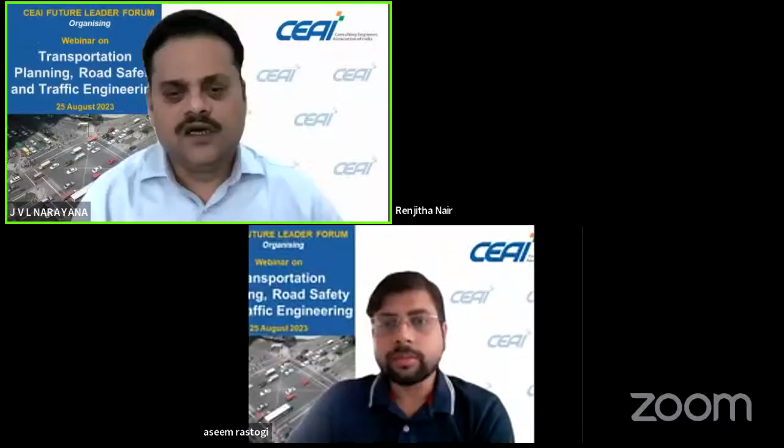I'm extremely happy to be part of this webinar organized by CEAI Future Leader Forum. You may all be aware that CEAI is an apex body of consulting engineers in India, having membership of organizations as well as individuals. It was incorporated in 1996 with the merger of two leading national associations: Association of Consulting Engineers India, established in 1960, and National Association of Consulting Engineers, NACE, incorporated in 1976.

Thus, you could see that we bring about 6 decades of accumulated experience as CEAI, and we have about 500 plus members today, representing large, medium, small consultancy companies and organizations, both from public and private sector, and eminent individual consultants. CEAI is also a member association of the International Federation of Consulting Engineers, commonly known as FIDIC, representing the consulting engineering fraternity in India.

Now, the objectives are quite clear: advocating global networking and cooperation amongst consulting engineers. Quality development is a key thrust, along with production and enhancement of consultants' expertise. Promotion of ethical practices of consultants is very key and pivotal for us. And then facilitation and interaction with government and other authorities to streamline and improve the system of working and the constraints that consultants face from time to time are some of the key objectives of CEAI.

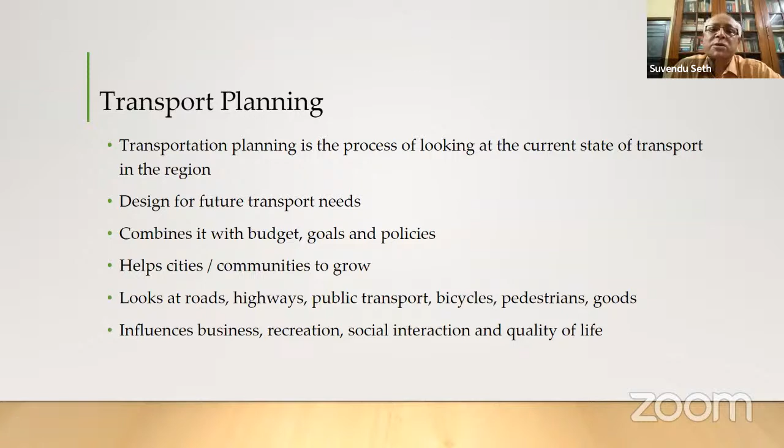We all have a basic idea of what transport planning is. It's a process of looking at the current state of transport in a region, then developing and designing for future transport needs, combining it with budgets, goals, and policies. It helps cities and communities to grow. It doesn't only look at one particular mode of transport, but various modes like highways, roads, public transport, and also non-motorized transport like bicycles and pedestrians, and not only passengers but goods vehicles too. It influences business, recreation, social interaction, and quality of life.

The purpose of transportation planning is to provide safer, smarter, faster, and more convenient modes of transport. We can look at two aspects: planning and programming. Planning is more of a long-term view of transportation strategies — it develops visions, goals, objectives, and then strategies to support that vision, establishing a long-term approach to implement those plans. Programming has more to do with prioritizing projects, matching projects with available funds, and establishing a tangible expenditure so as to implement the project and achieve success in it.

The process of transportation planning is normally referred to as a 3C process: comprehensive, cooperative, and continuous. Comprehensive because it covers the entire planning area, as well as various jurisdictions and various modes of transport.

Transport planning is cooperative because each jurisdiction needs to interact with each other so that transport planning for the entire area can be possible. It is continuous because we cannot just make a plan and keep it; it changes over time. It involves land use, air quality, water quality, environmental policies, and social equity, and there are a lot of stakeholders.

First and foremost are the citizens; the plans are made for them. Then there are businesses, and governments at three levels: local, state, and national. There are various specific interest groups involved, starting with public transport, pedestrians, and various other groups, and it all works within a legal system.

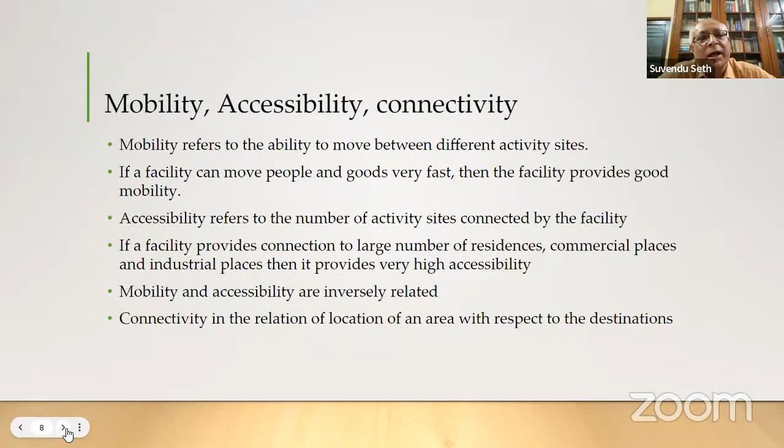Accessibility refers to the number of activity sites that can be connected, so accessibility and mobility are inversely related—if a system has very high accessibility, it will have less mobility. Connectivity is the relationship of a location with respect to its destinations, so we can say a particular area is well connected to A, B, and C. These are the overall ideas of mobility, accessibility, and connectivity.

First, let's talk about the present scenario of transportation, which we are all aware of. All categories of road users face problems in everyday commuting. Pedestrians do not get a safe place to walk and often face obstructions in the pathways. Cyclists find it very difficult jostling between fast-moving vehicles and do not have dedicated ways in most cities.

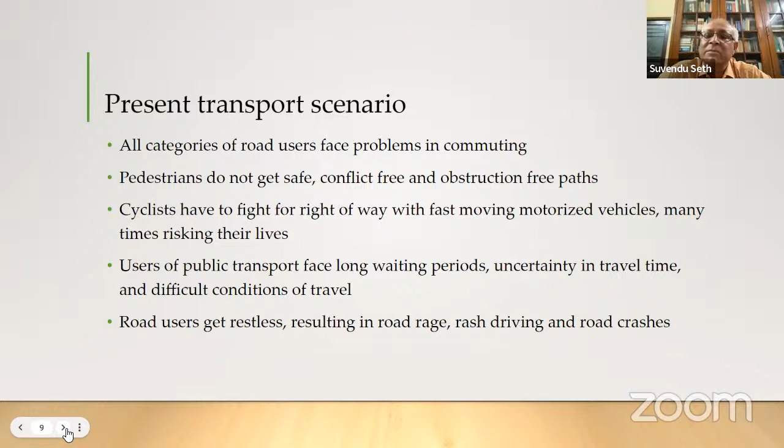Users of public transport face long waiting periods, service is often not good, and travel takes a long time. Road users get restless, resulting in road rage, rash driving, and road crashes, which is not at all good.

There is deficiency in transport infrastructure in terms of both quality and quantity. More sustainable modes like walking, cycling, and public transport are often neglected, and their use is decreasing. There's a preference for people to first get two-wheelers, and then, when they can afford it, cars. This in turn gives rise to more congestion, reduced road safety and mobility, and increased use of fossil fuels and road crashes.

To address these issues, our National Urban Transport Policy was developed in 2006 and revised again in 2014. Its first vision was to recognize that people are at the center stage of all plans, and that plans should be for them and for their benefit, to make cities livable—and if cities are livable and people can do their work properly, they can turn into engines of growth.

The policy aims to allow cities to evolve into an urban form that best suits their geography and supports their socioeconomic activities, because one model may not fit another city since geographies and socioeconomic characteristics differ. It also aims to encourage growth along a low carbon path.

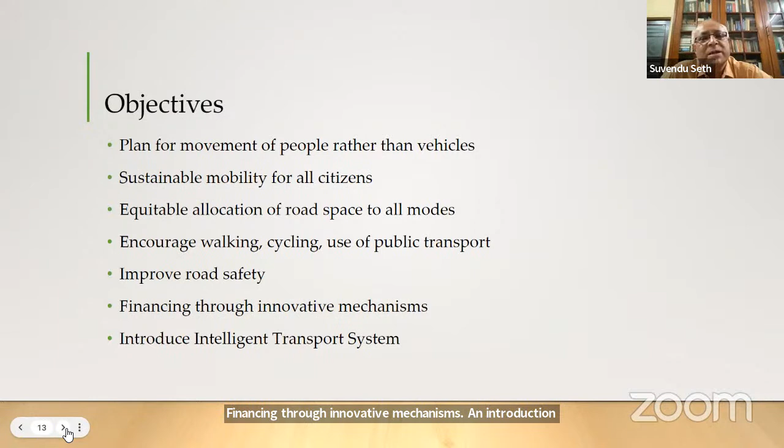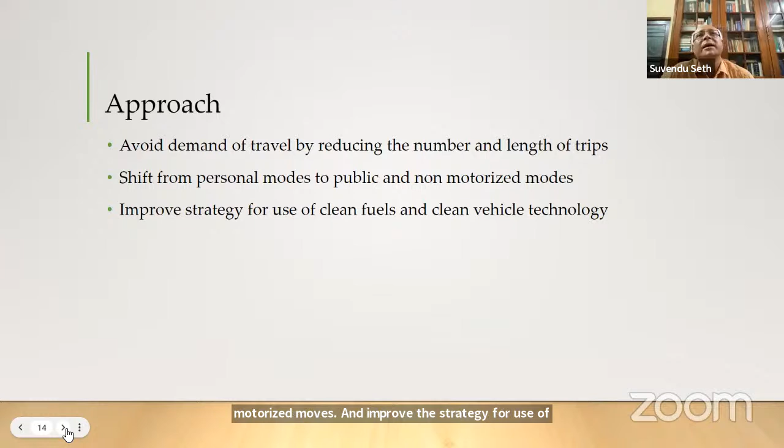The approach is avoid, shift, and improve. Avoid the demand of travel so that fewer trips are made and trips are less lengthy. Shift from personal modes to more public modes and non-motorized modes. And improve strategies for use of cleaner fuels and cleaner vehicle technology for sustainable transport.

One important thing in transport planning is multimodal integration - the integration of various modes of transport, such as metros, BRTs, LRTs, local trains, buses, trams, and water transport. Integration is very important, and it improves access and coverage, and avoids duplication of services in the same areas.

The idea is to make trips short in time and distance, minimizing the number of transfer points to make it easy for people to transfer from one mode to another. The various aspects of multimodal integration are physical integration, information integration, and fare integration. I'll go over these in short.

The first one is physical integration. This means co-locating various modes of transport - for example, a taxi stand or bus terminal right outside a railway station, or walkways to connect buildings. These help people move from one mode to another.

Connecting networks at the airport - connections with LRTs, trams, metros, or ferries, and walkways - make it easy for people to use one mode and go into another. Terminals and station facilities are very important for transfer, and facilities like cycle storage or walkways help people access terminals better.

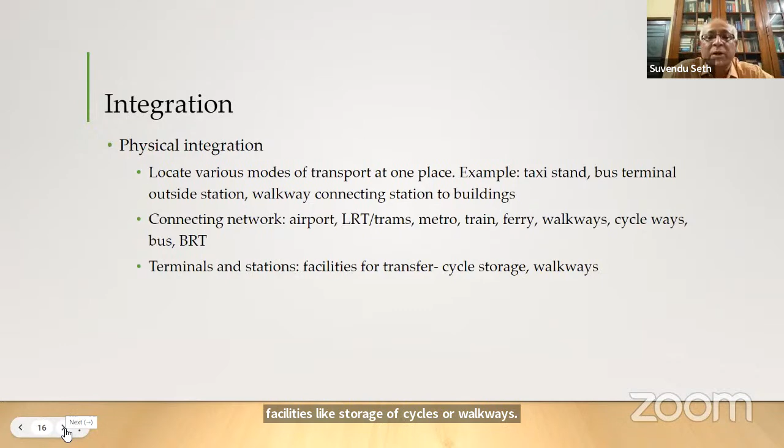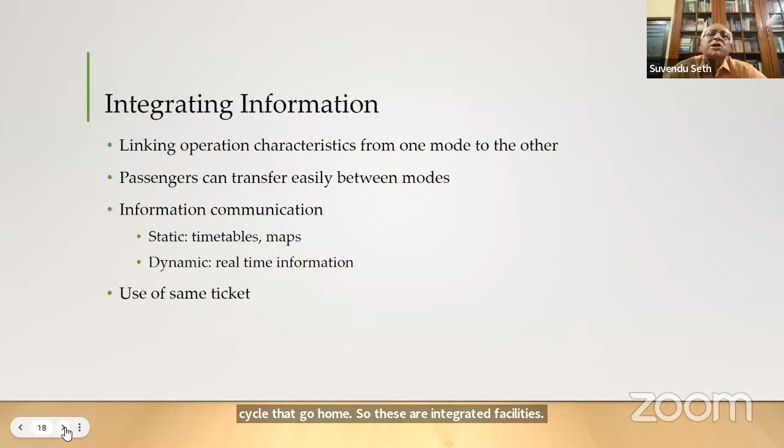Next, coming to integration of information - this is linking operational characteristics from one mode to another so passengers can transfer easily. They have information to see where the next stop is, what facilities are available, and so on.

This information communication can be either static or dynamic. The old way was static mode - timetables and maps. Nowadays we can have dynamic real-time information on web applications, where you can see where the next station is, when the next train or bus is coming, and so on.

Use of a single ticket is also very useful, so one does not have to buy tickets for every system - one ticket covers all.

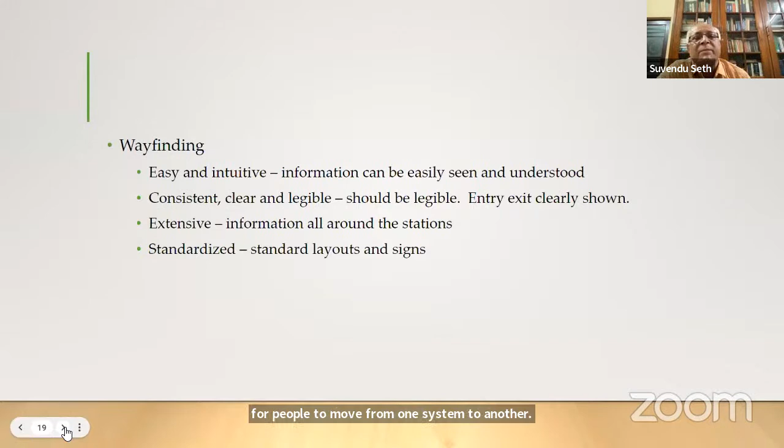The next is wayfinding - by means of signage and markings, making it easy for people to move from one system to another. This should be easy and intuitive, with information that can be easily seen and understood. It requires clear and legible signs and markings, with entry and exit clearly shown.

Information should be all around the station so that even if one misses one sign, they can see the next one. It should be in standardized forms, layouts and signs so that one can recognize the signs and look for it in the next place.

Next comes the integration of fares. If the fares are integrated, it will be easy for passengers to transfer between modes. They do not have to pay every time.

A common card is one example, the Oyster card in London, which can be used for buses and the underground. Then there's common transfer, free transfers between train and bus - if you have a train ticket, you can get a ride on the bus or the other way around. And integrated ticketing, like if you go into the airport, you can get a free shuttle or use of a shuttle with paid parking. These facilities can encourage people to use multimodal transport.

I'll come to another topic, which is transit-oriented development. This has become quite common now in several parts of the world. It is a development around a major transit station, which could be a railway station or a BRT station where mass transit can occur.

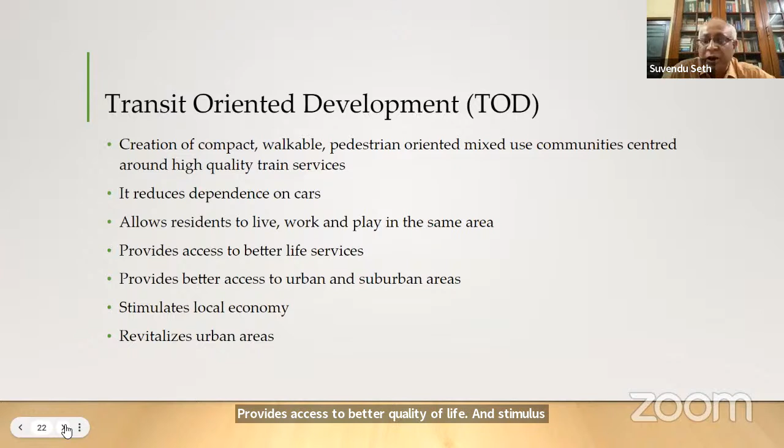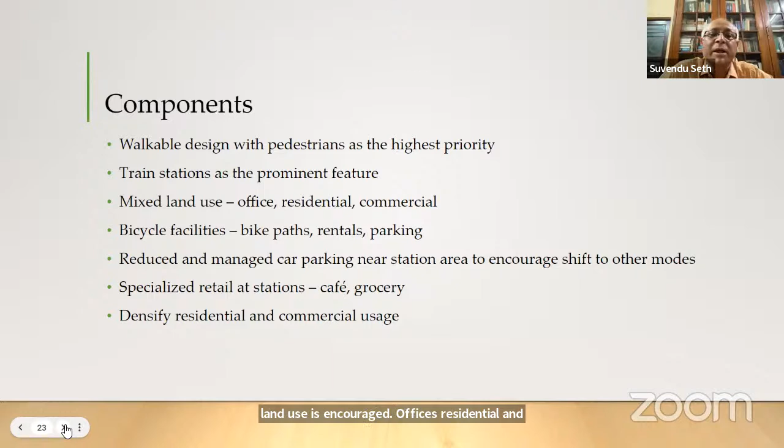The components of a TOD are walkable design with pedestrians at the highest priority - it's designed around pedestrians first. Train stations are the prominent features. Mixed land use is encouraged - offices, residential and commercial buildings so that people can do their work easily. After walking, it's bicycle facilities, rental and parking facilities.

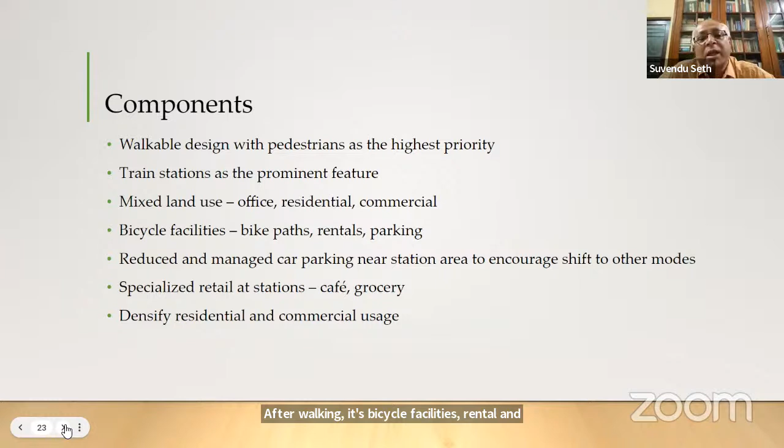Car parking is reduced and managed, and can be put in the peripheries because emphasis on car usage is less. Specialized retail can be put up in the station areas so that people can do their groceries, go to the cafe or restaurants. Density and high density residential commercial buildings are encouraged.

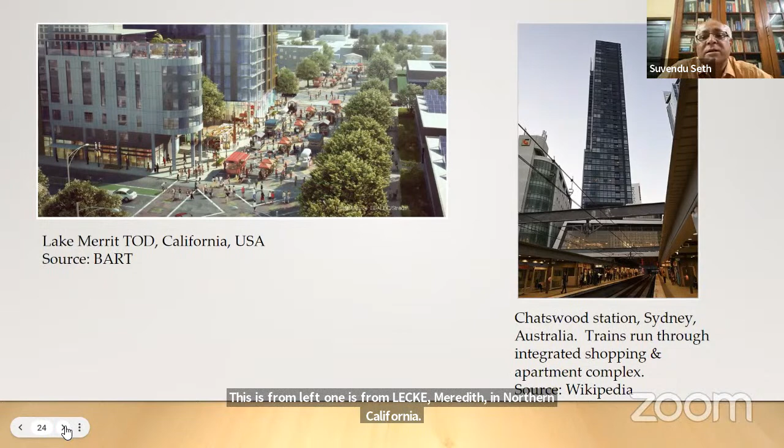Here are a couple of examples of TOD. The left one is from Lake Merritt TOD in Northern California, and the right one is from Sydney. It shows the train station integrated with the buildings so that people can get down from the building and take the trains directly, making it very easy for them to use.

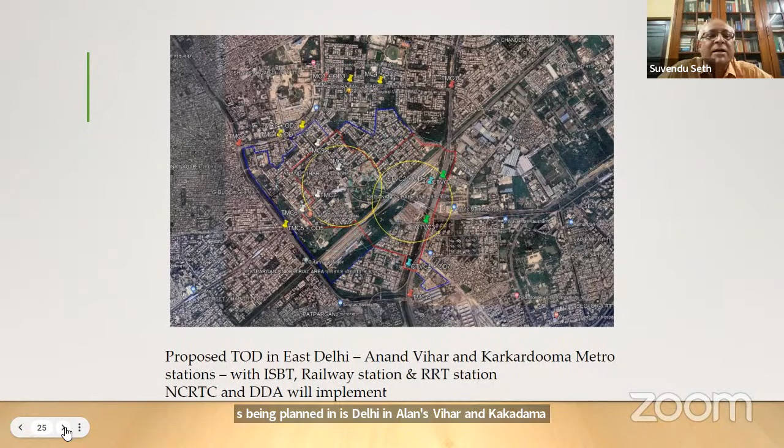The next topic is inland waterways. In India, we have always had waterways, but somehow it wasn't very encouraged for quite some time. In the last 10 to 15 years, it has picked up again. The major waterways are NW 1, 2, 3, 4 on River Ganga, Brahmaputra, in Kerala on the west coast, and on the Krishna rivers. The Jal Marg Vikas project was taken up to connect Varanasi and Haldia, to have a fairway, and this project is still underway.

Apart from these overall country-level projects, in the urban areas water ferries are also getting improved. We already have water ferries in Kolkata, Guwahati, Kochi, and Mumbai.

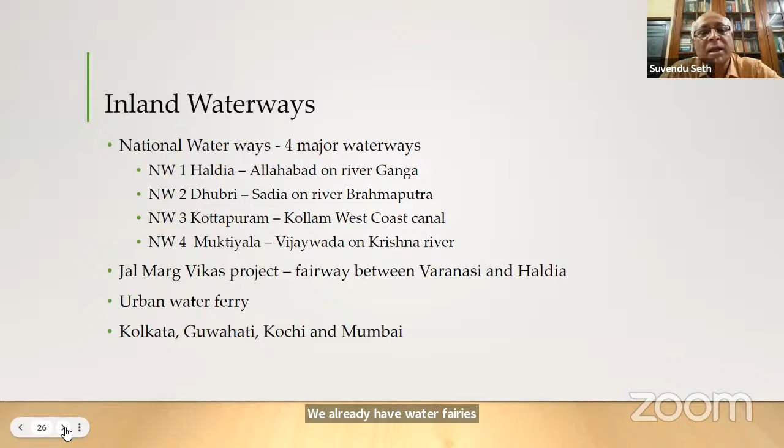This is a figure showing the waterways in eastern India - Ganga, Brahmaputra in Assam and in the states of West Bengal, Bihar, Jharkhand, Uttar Pradesh. We also have a protocol route, India going through Bangladesh, used for sending goods and ships through Bangladesh to Assam from Haldia. This has been going on for some time and has encouraged water transport.

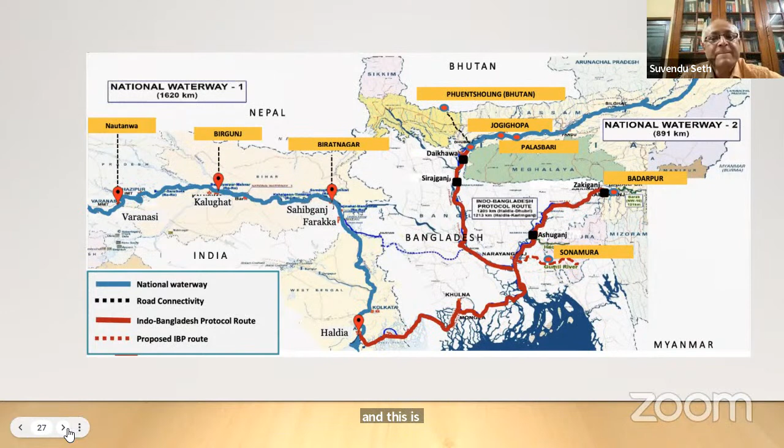For urban ferry services, the important thing is to look at routes and service types. Traditionally, the service type has been cross-river, from one bank to the other. Generally, there are three types of services: a linear system where various points along the river are connected, a simple river crossing with 2 points on one side and 1 point on the other, or linking suburbs with the inner city.

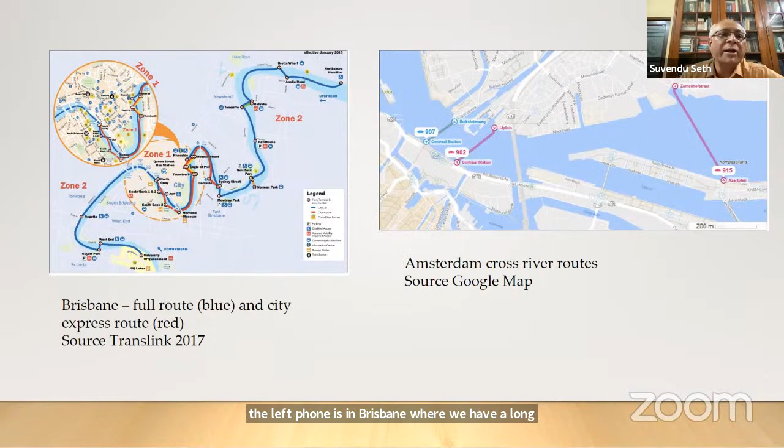I'll give some examples. On the left is Brisbane, where we have a long distance service from inner areas to the main city, and again an express service inside Brisbane to connect various points along the river. Amsterdam is the example here connecting point to point across the river, with many ferry services across the river for people to use.

This is from Stockholm, where all 3 types are present. We have the A type, in blue, connecting various points. B type, in red, which is a 3-point connection in the city. And the yellow one, connecting the inner areas to the city. All 3 types are present there.

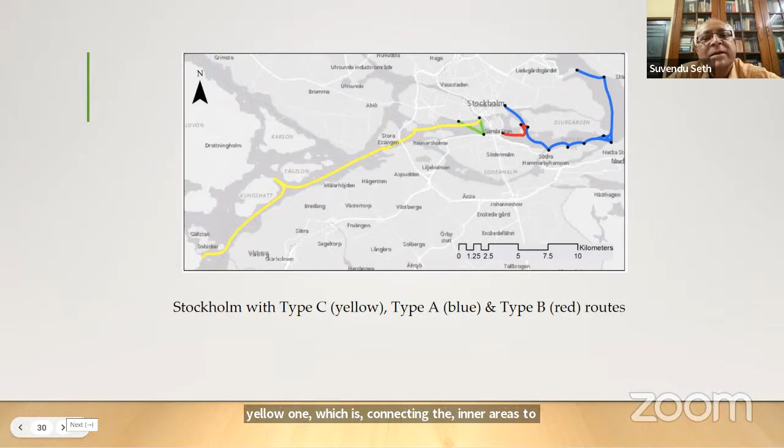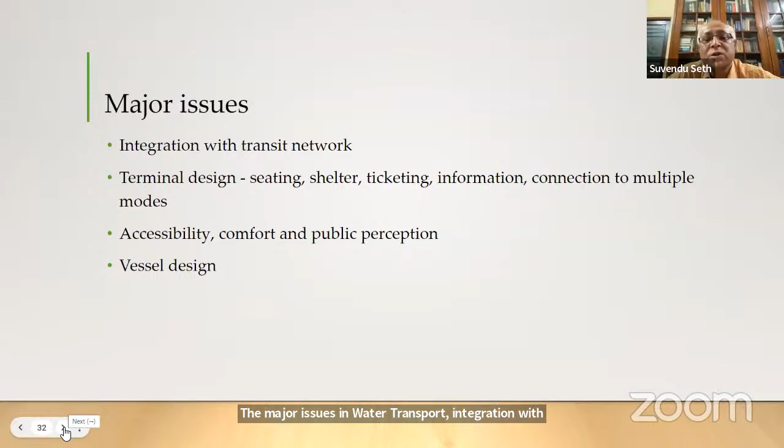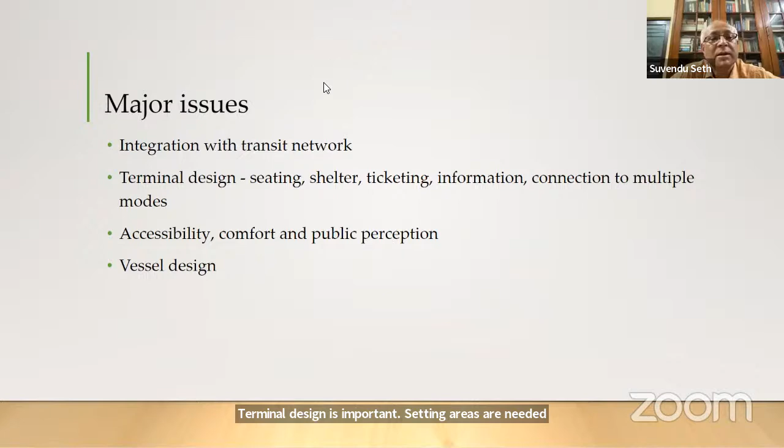The major issues in urban water transport are integration with the transit network. It has to be well integrated with other networks so that people can use it easily. Terminal design is important - seating areas, shelter, ticketing, information, and connection to other modes are needed. Accessibility, comfort, and public perception also matter. Public perception is important because if the public perceives that ferries don't run on time or aren't reliable, people will not use them.

Another important point is vessel design - not all kinds of vessels can be used for ferries. There are specific types of vessels to be used. This is a major aspect of water transport.

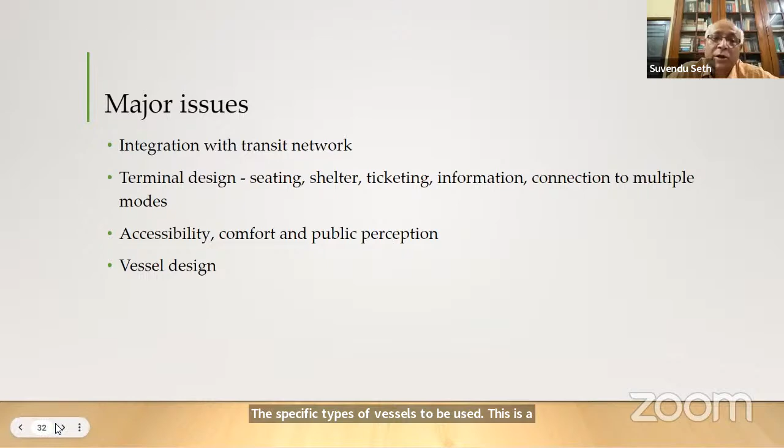Some pictures from India. Kolkata Ferry Service, which has been there for a long time. Guwahati Ferry Service, which has also been there for quite some time and is now being modernized. Kochi has a new water metro system, connecting the various inner areas to the newly created metro through this water metro.

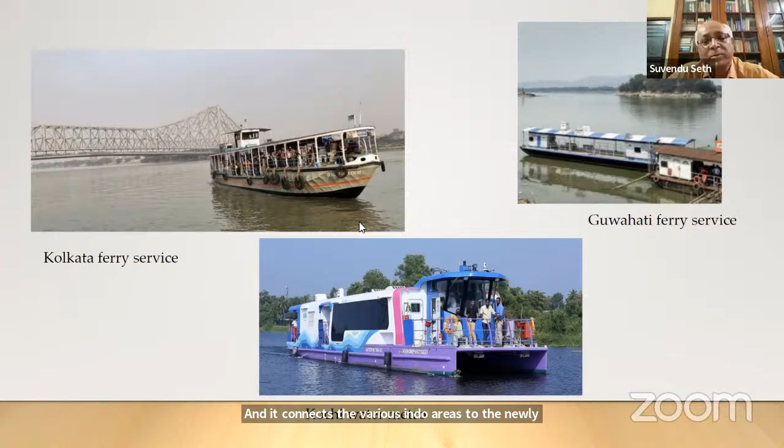Now I'll go to the next topic, which is road safety. This is a very important topic. I'll just touch on a few points in road safety.

First, I'll give a few statistics, which are not very nice. Nearly 1.25 million people die on the roads from road crashes, and 3,287 people die every day - this is just the number of fatalities. On top of that, there are people who get injured or disabled, a huge number, 20 to 50 million people. I won't go over all the statistics, but most people affected are young people between the ages of 15 and 44. One sad fact is that over 90% of all road fatalities occur in low and middle income countries, where these countries have less than half of the world's vehicles but contribute to more than 90% of the fatalities.

The situation in India is also not very nice. We have more than 4.5 lakh crashes occurring every year - this data is a few years old, so it may be even more now. The fatalities are more than 1.5 lakhs, and again here in India, it is young people who get hit, injured, and killed. The national highways comprise around 2% of the road network but contribute to 30% of crashes and 35% of fatalities. State highways comprise 3% of the road network but contribute to 25% of crashes and 27% of fatalities. Pedestrians, cyclists, and two-wheelers together contribute to more than 54% of the fatalities - these are the vulnerable road users.

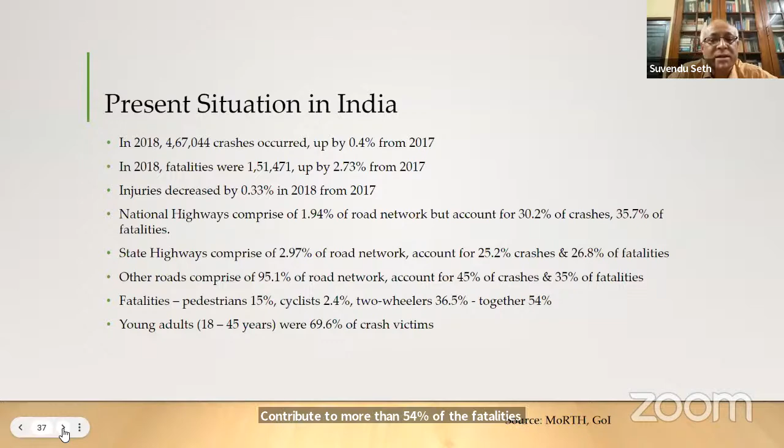A global plan for road safety action was developed, from 2011 to 2020, but it has now been extended to 2030 to address this issue of road safety globally. 5 road safety pillars were made to address road safety issues: road safety management, safer roads and mobility, safer vehicles, safer road users, and post-crash response.

There are various approaches to address road safety. I'm talking only of the engineering parts - there are various other non-engineering aspects also, which I'm not touching today. The 3 main approaches here are crash analysis, mitigation measures, road safety audit, and the international road assessment program. I'll briefly go over these topics, starting with crash analysis.

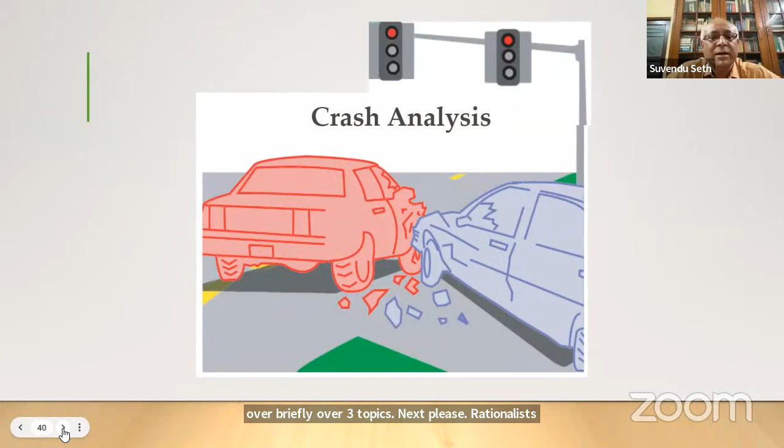Crash analysis identifies the location where most crashes occur, then quantifies what kind of crashes occur, what are the problems, why it occurred, and then tries to find out improvements - what can be done to improve the situation so that these crashes can be avoided - and then implement those actions so that the situation can be improved. In short, that is what is done in crash analysis.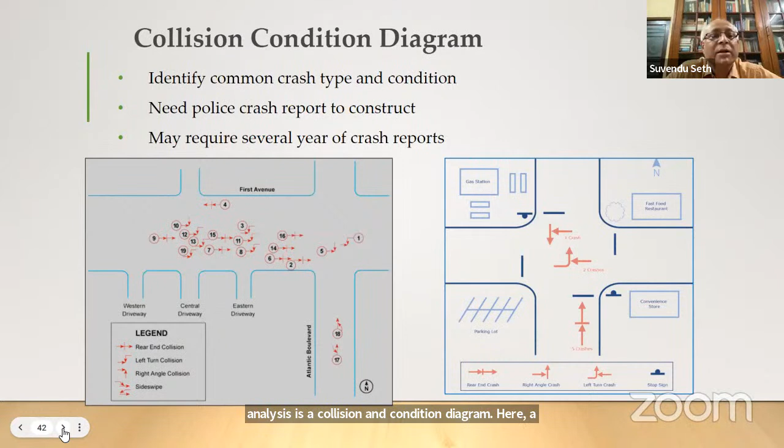One important analysis tool in crash analysis is a collision and condition diagram. Here, a graphical representation shows what exactly happens and why the crash happened. Various legends like rear end crash or left turn crash use various symbols, put into the figures so that one can understand just by taking a look at it what kind of crashes happened, how many crashes happened, and whether it was injury only, severe injuries, or fatalities. Also, the day, time, and weather conditions are put into this map.

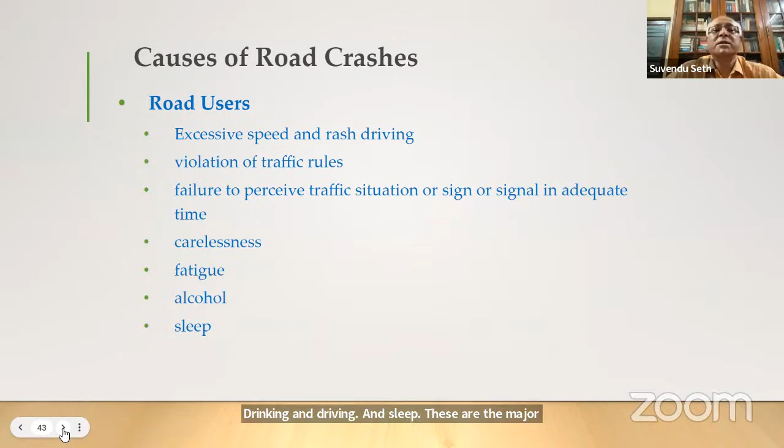The various causes of road crashes include the road users and other causes. The typical road user causes are excessive speeding, not obeying traffic rules, or failure to perceive the traffic situation ahead - probably the signs or signals could not be read. Carelessness, fatigue, drinking and driving, and sleep are the major causes of road crashes by road users.

Then there are reasons related to vehicles, which probably were not functioning properly. Road conditions - it was either foggy, or skidding, or the road surface was not good. There were potholes and ruts. Road design could have flaws in the geometric design. Sight distance available was probably not proper. Shoulder widths were not present. The curves were too sharp. Traffic control devices were probably not right.

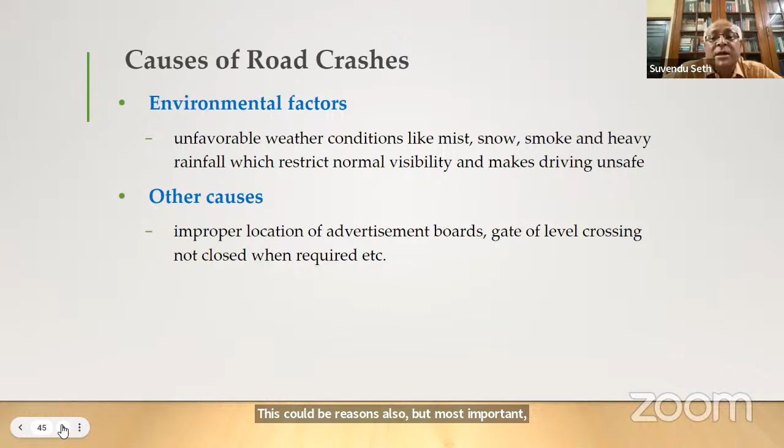There are environmental factors like snow, mist, and fog, where one could not see the road properly. Apart from that, there could be other causes also - for example, a big advertisement board which blocked the vision, or a level crossing gate that did not close properly. These could be reasons also, but the most important are the users' causes.

If you look at the crash factors, human factors contribute the maximum to the crashes, followed by environmental and vehicle factors. And when they overlap, it becomes even more risky.

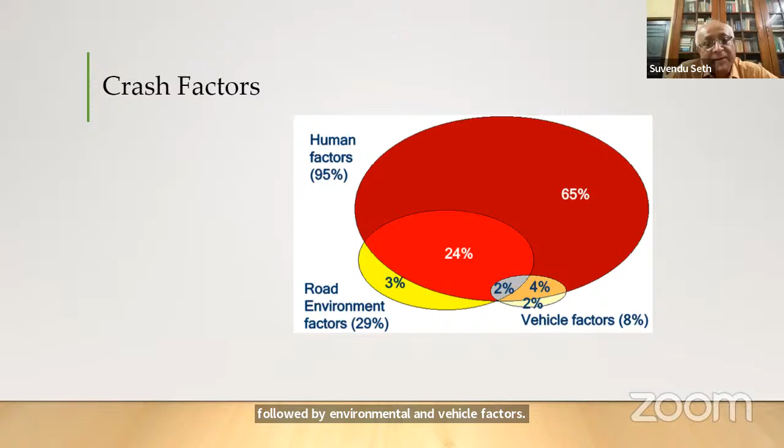Crash data collection is the first step to crash analysis. Police has the responsibility of keeping the records for crashes. The engineer has to gather the record, analyze at what spots those crashes occurred, and then analyze why it happened and what actions are to be taken.

The crash data that is collected normally includes the date, time, and where it occurred - the location, the type of vehicles involved in the crash, and the nature of the crash. Collision diagrams are drawn from it, and the numbers are found for injury only, property damage only, or fatalities. These things are all analyzed.

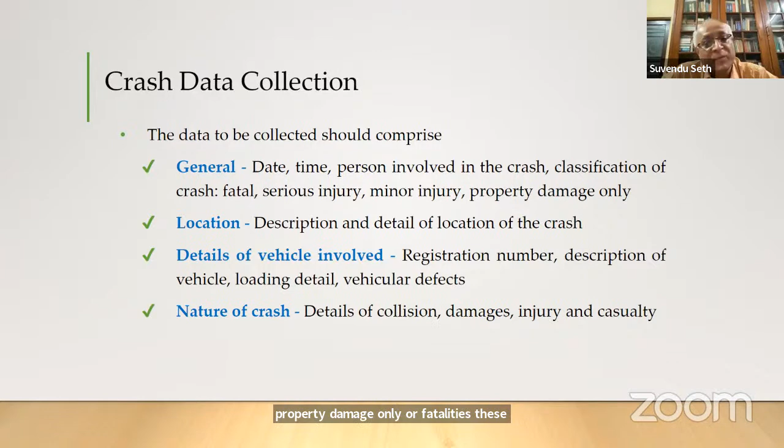Now, the next question is about the black spot. We hear a lot about black spots these days. A black spot is basically where a number of crashes occur - so it's called a black spot. According to the MORTH protocol, any location where more than 5 accidents have occurred in the last 3 years, or any location where more than 10 fatalities have taken place in the last 3 years, is called a black spot. By spot, we don't mean just one location - it's about 500 meters in length. If these things have happened within that length, then it's defined as a black spot, and action needs to be taken.

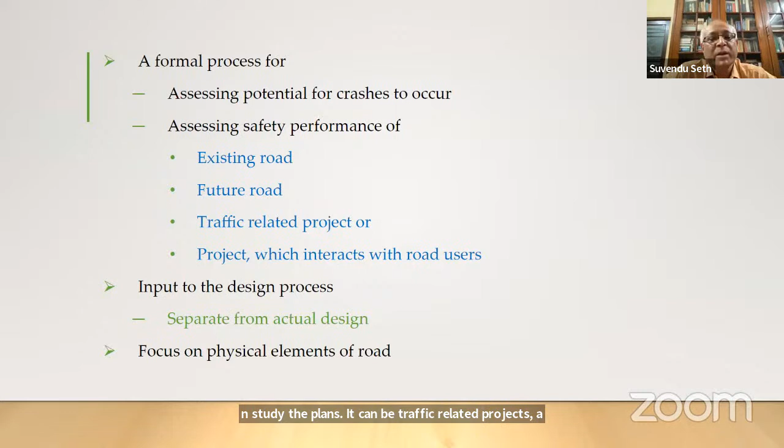Coming to the next part of road safety, which is road safety audit. A road safety audit is a formal process. It assesses the potential for crashes to occur - it does not do crash analysis, it sees where crashes can occur. It can be for an existing road or a future road, where we study the plans. It can be traffic related projects, a project which interacts with other road users. This is separate from actual design because it looks at the possibilities or risks where crashes can happen, and focuses on the physical elements of the road.

The aims of road safety audit are to minimize the risk and severity of accidents, to minimize or avoid accidents on the network, and to meet the needs of safe usage by all kinds of users, not only a specific type of user. It also reduces the long-term cost of schemes, because if we can take actions early on in the project, costs can be saved later on.

This improves the awareness of safe design practices. Nowadays we use the safe system approach to find out mitigation measures.

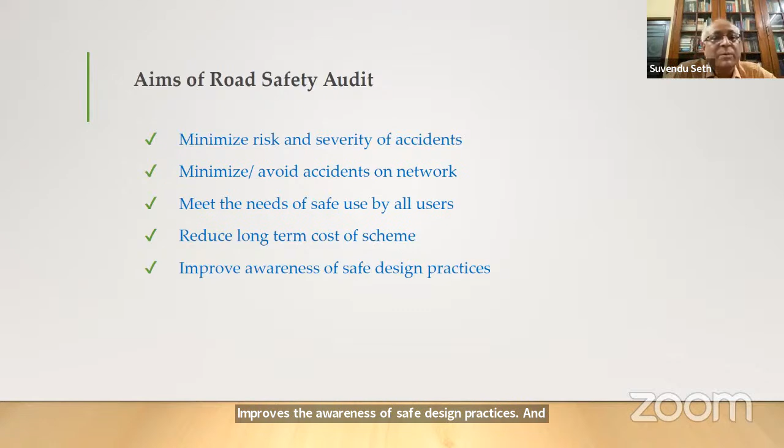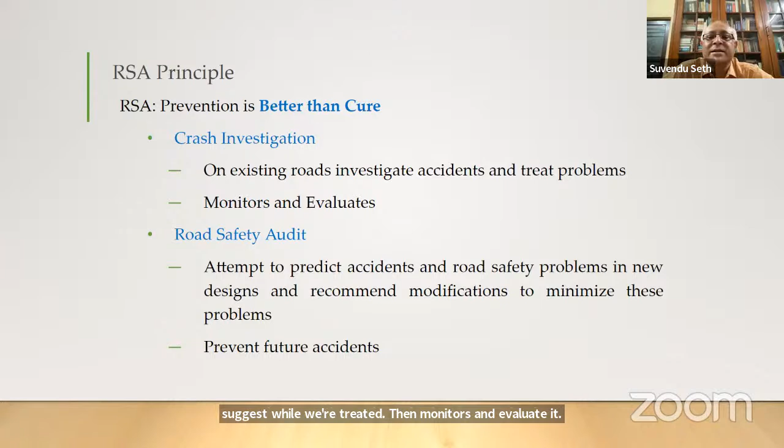The principle is prevention is better than cure. The difference with crash investigation is that crash investigation looks at the existing road and accidents that have occurred, suggests how to treat it, then monitors and evaluates it. But road safety audit attempts to predict accidents and then take action before they occur.

Now, who should be carrying out the road safety audit? Road safety audits should be carried out by an independent team. The independence from the design team is very important, because if the designers do the road safety audit themselves, they will be very partial towards their design. So it's always advised to have an independent team. The team should have at least 2 people, maybe 3.

They should be experts, meaning they should have knowledge and experience in conducting road safety audits. They can be traffic or highway engineers, road safety educators, traffic police personnel, or maintenance specialists. But the important part is they should have experience and qualifications.

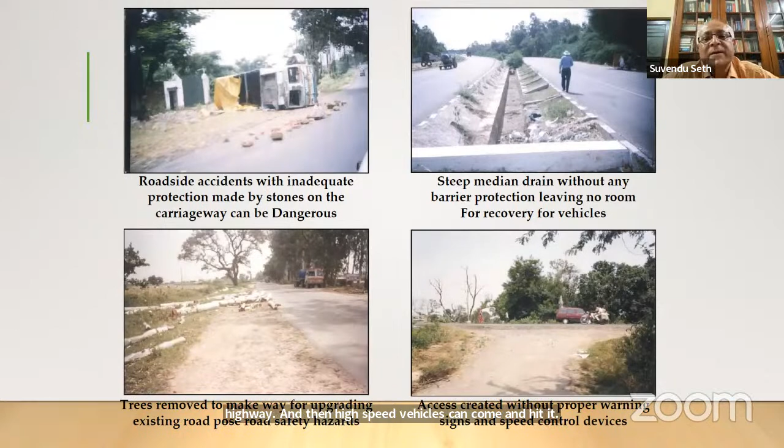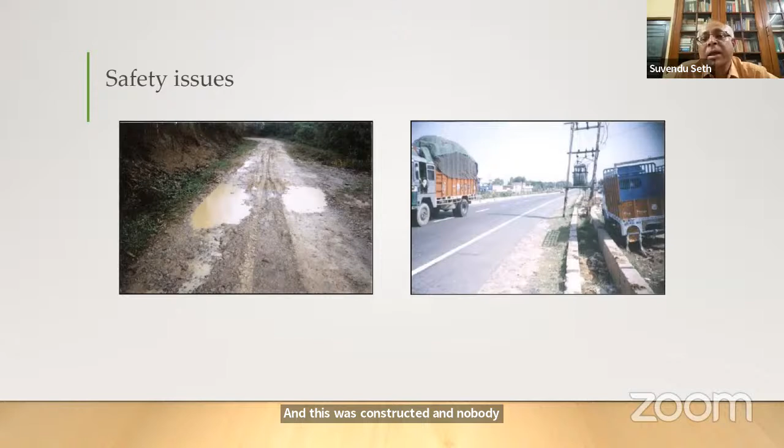The right side picture shows a transformer right on the side of the highway. If vehicles lose control, they can go and hit the transformer, causing a major situation there. This was constructed, and nobody took any action to remove the transformer to a better place.

So that was about road safety audits. I'll now go to the next section, which is the International Road Assessment Programme, iRAP.

This is an international program, a road safety management tool that takes into account the Sustainable Development Goals of the United Nations and the Global Plan for the Decade of Action for Road Safety. This is a tool that rates crash potential. There are star ratings for road infrastructure, and it can be used for preparing safer road investment plans with appropriate countermeasures.

The star rating is done based on various parameters. There are more than 50 attributes looked at while rating a road for its safety quality. This is done through safety inspections and road safety impact assessments. A 1-star road has the highest risk, and a 5-star road is the best, with the lowest risk. Star ratings are produced without reference to detailed crash data — you do not have to have detailed crash data analysis done to use the rating system.

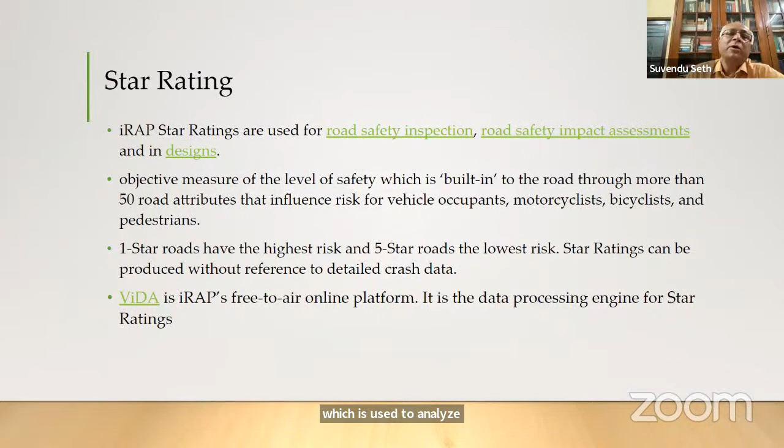ViDA is a software available online, free, and used to analyze videos and data for rating and giving a safety score. This is the star rating process: it starts with a road survey, normally by a survey vehicle with videos and photographs taken, or else it could be done from the design drawings.

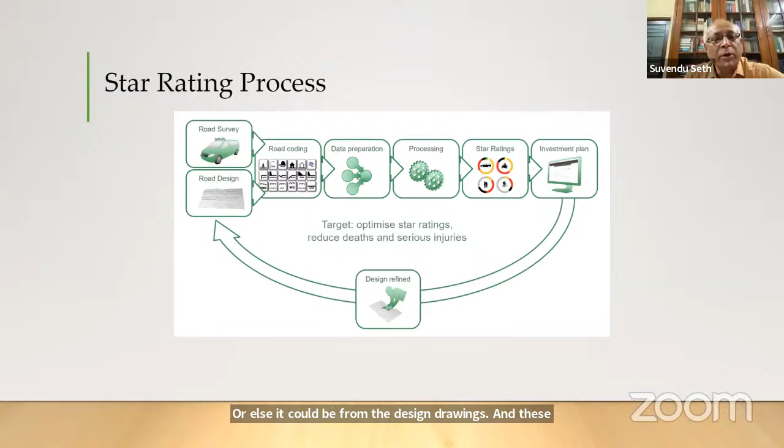All the roads are then coded in proper terms so that the software can be used. Then the data is processed and analyzed, and star ratings are given. Safety ratings and safety numbers are also given for star ratings. From there, investment plans can be prepared, designs can be modified, and the whole process can be repeated.

The target is to optimize the star rating, improving it from 1 to 3 at least, and reduce the deaths and serious injuries.

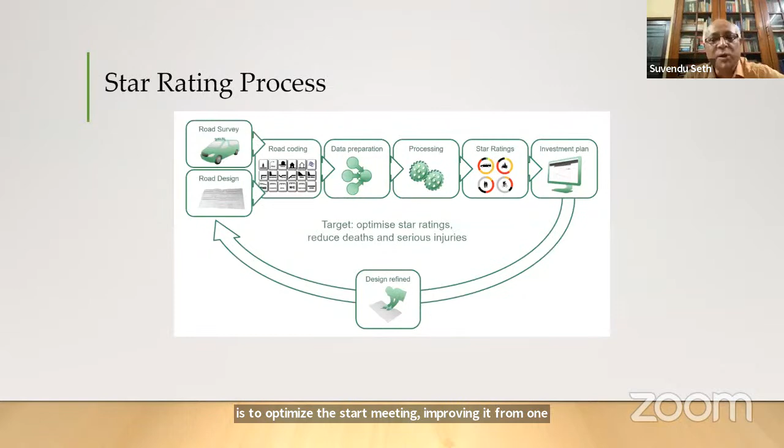The ratings are for various categories of users: the occupants of cars, motorcyclists, pedestrians, or bicyclists. The idea is to first assess what is the existing star rating and what percentage of roads are at that star rating, then do an initial design and see how it improves, then a final design and how it improves. The idea is to have at least three-star rating road systems.

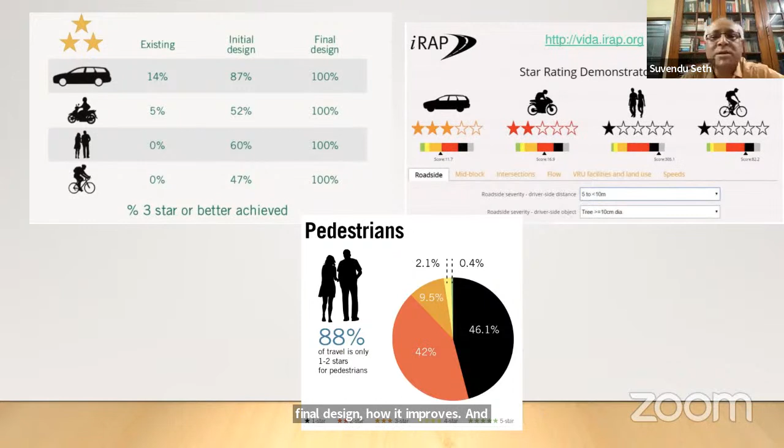Now I'll move into traffic engineering. We all have a basic idea of what traffic engineering is. It deals with the analysis of traffic movement on the road network, so that design facilities can be done smoothly for the smooth flow of traffic for safe and economic operations. Traffic flow is like the flow of water—just like water flows through pipes and channels, traffic flows on the roads and various other facilities. There are several parameters related to traffic engineering.

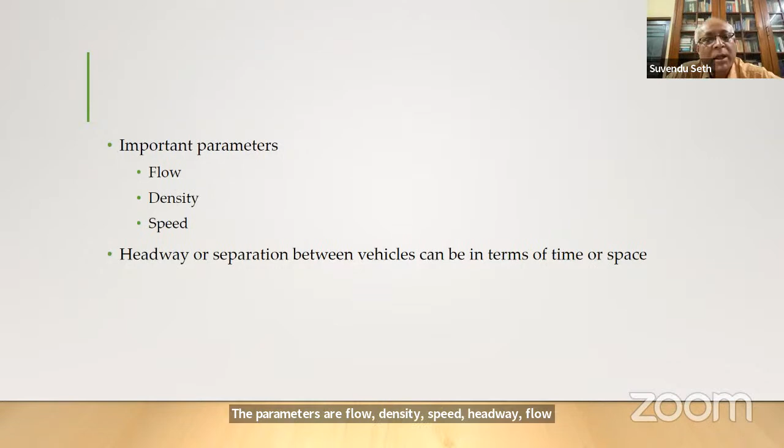The parameters are flow, density, speed, and headway. Flow is traffic volume, and headway is the separation between two vehicles, either in terms of time or in terms of space.

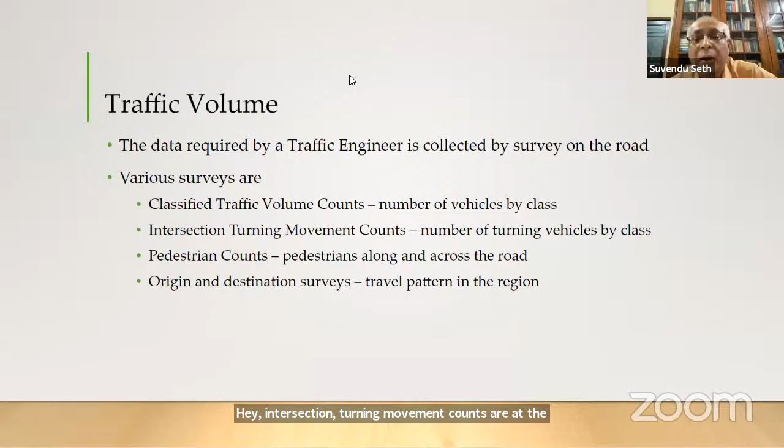Traffic volume is measured on the road. It is done by primary surveys by traffic engineers to collect data from the road—it is a number of vehicles moving. There are various types of counts: classified volume counts, intersection turning movement counts, pedestrian counts, and origin destination surveys. The purposes are different. In classified traffic volume counts, the number of vehicles are counted as per the class of vehicle, whether it's a car, a two-wheeler, or other class. Intersection turning movement counts are at intersections where the turning movements are counted in terms of classes of vehicles also. Pedestrian counts are for counting the number of people walking along the road or across the road.

Origin destination surveys capture travel patterns, normally done by the roadside interview method, where vehicles are stopped and asked where they are going, where they are coming from, the purpose, and so on.

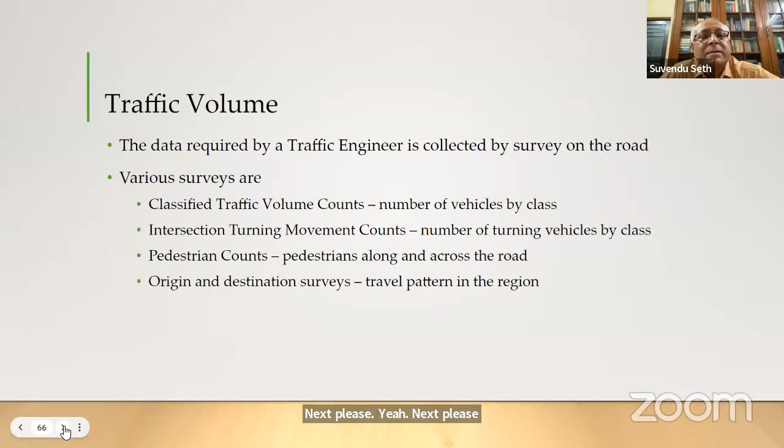Now we come to the concept of PCUs. We know that in urban roads there are various types of traffic that use the road—there's a mixed flow of traffic, and putting them all in one unit is very important. That is the passenger car unit, and various classes of vehicles can be converted to passenger car units. There are factors for that, and IRC 106 gives these.

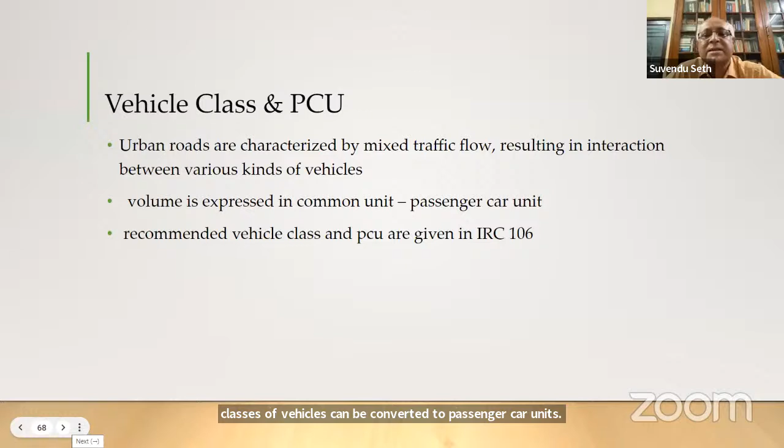In terms of PCU, two-wheelers or motorcycles can be 0.5 or 0.75 depending on composition—what is the composition of two-wheelers in the total number of vehicles. If it's 5% or less, it's taken as 0.5. If it's more than 10%, it's taken as 0.75. Similarly for other classes of vehicles also.

The various types of volume counts are the average daily traffic, annual average daily traffic, average annual weekday traffic, weekday traffic, and so on. What we do is traffic counts are collected for 7 days, or at some places 3 days, and the average daily traffic over the days is computed. From there, seasonal variations are used to convert into annual figures, using a process of seasonal variation factors.

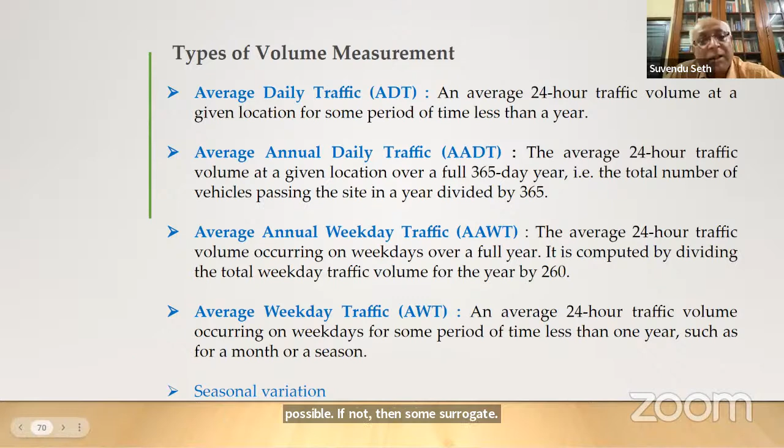Several data points are needed. For example, if we have time series data at that location, we can understand what kind of seasonal variation is possible. If not, some surrogate figures are used, like sales of petrol or diesel throughout the year. From there we can find out the seasonal factor and get the annual average daily traffic. This is an example of the variation in hourly flows over a 24-hour period.

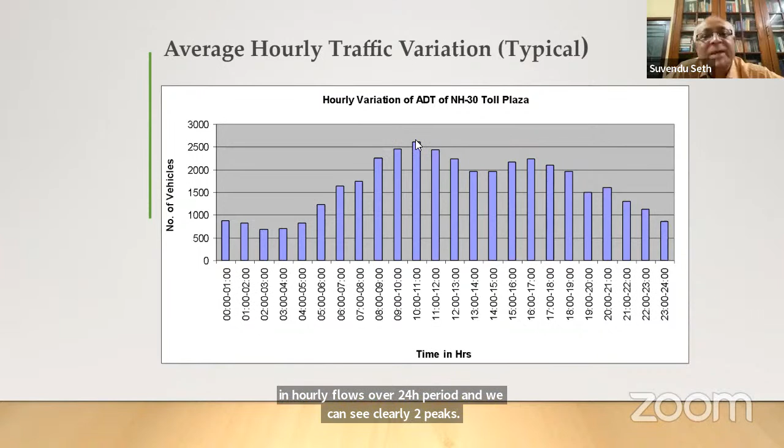We can see clearly two peaks, usually the morning and the afternoon peaks.

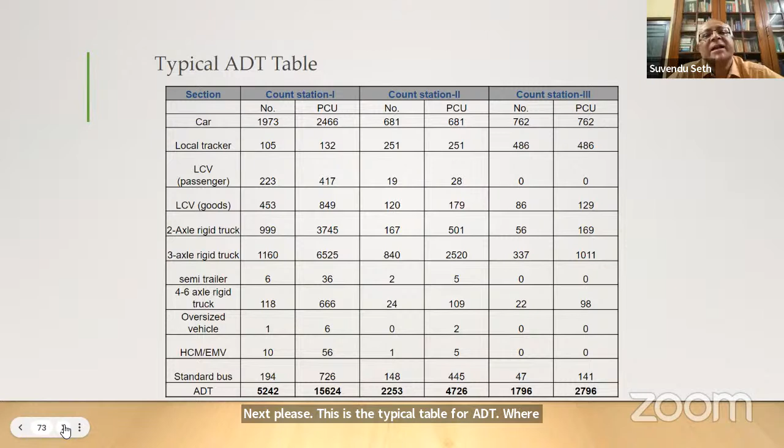This is the typical table for ADT, where various types of vehicles are shown on the left side, and for various count stations, what are the numbers and what are the PCU values for those. Adding together, we get the ADT, on which we apply seasonal factors to get the AADT.

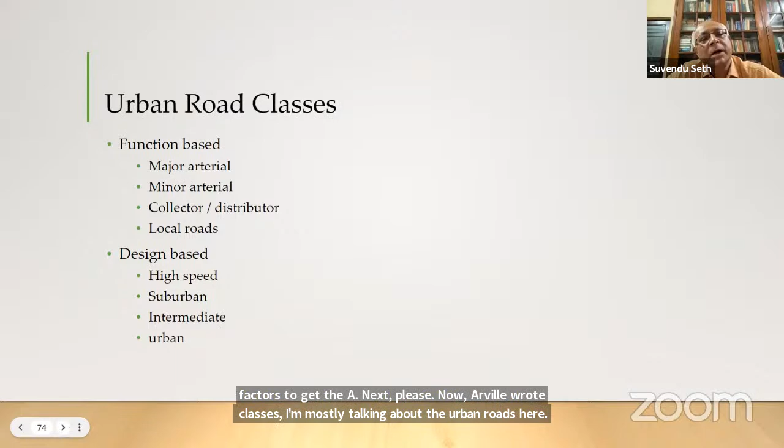Now, urban road classes - I'm mostly talking about urban roads here. Either they're functionally different, or they're for design purposes, we look at different scenarios. For functional purpose, the roads are major arterials or minor arterials. Then comes the collector or distributor road, which feeds into the minor and major arterials. Then the local roads, which feed into the collectors and distributors.

Then for design point of view, high-speed roads are designed in certain different ways. The access is less, mobility is high. And then as we go down to suburban, intermediate, and urban, access becomes more important and mobility goes down.

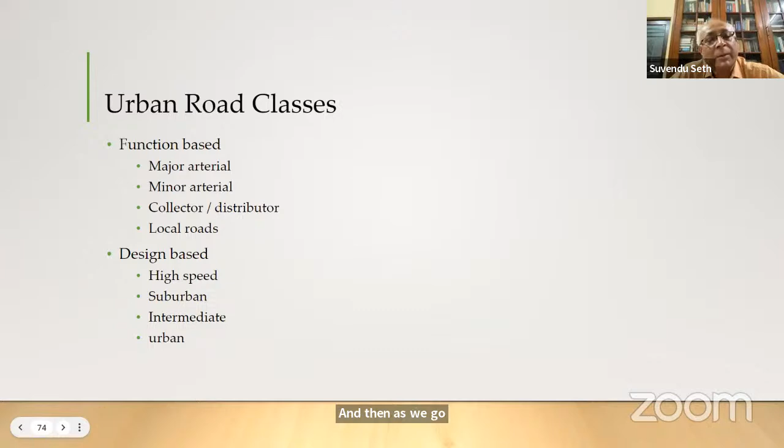I'll talk here about capacity and level of service. Capacity of a system is the maximum number of vehicles or passengers that can be carried in a given condition per unit time - the absolute number of people that can be carried, that's all. The level of service relates to the quality of service of that flow. It's expressed in the US Highway Capacity Manual and also in the Indo Highway Capacity Manual in terms of letters A to F - A being the best, where it is free flow, and F being the worst, where it is nearly chock-a-block, practically at capacity.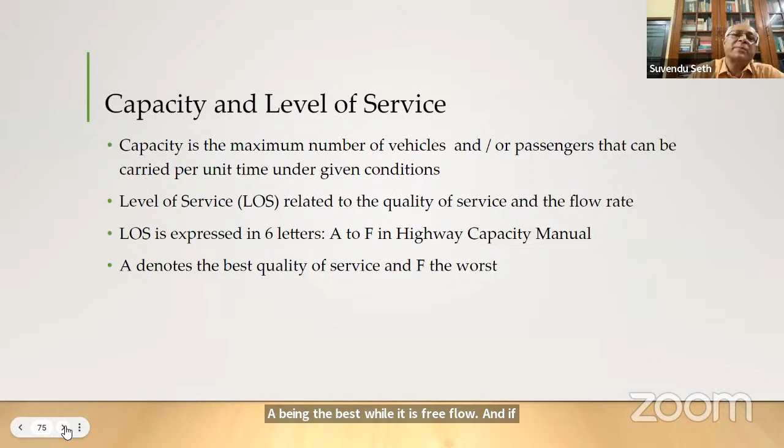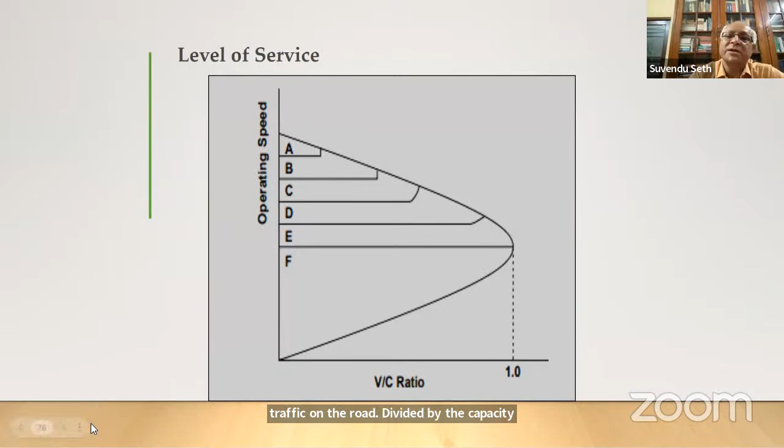Here it's shown in a graphical form, operating speed versus V/C ratio. V over C ratio is the volume to capacity ratio, the volume of traffic on the road divided by the capacity. As we see, as the volume to capacity ratio increases towards 1, the operating speed goes down and the level of service also goes down from A to F.

There are different levels of service standards given by IRC. IRC 64 shows design service volume for various types of roads - 2-lane, 4-lane, or 6-lane road - at the various levels of service. Design service volume is the volume that facility can carry at that level of service. For level of service A, for a 2-lane road, 10,350 vehicles per day is the maximum it can carry at LOS A. So at LOS E, it's the capacity - it's the ultimate capacity.

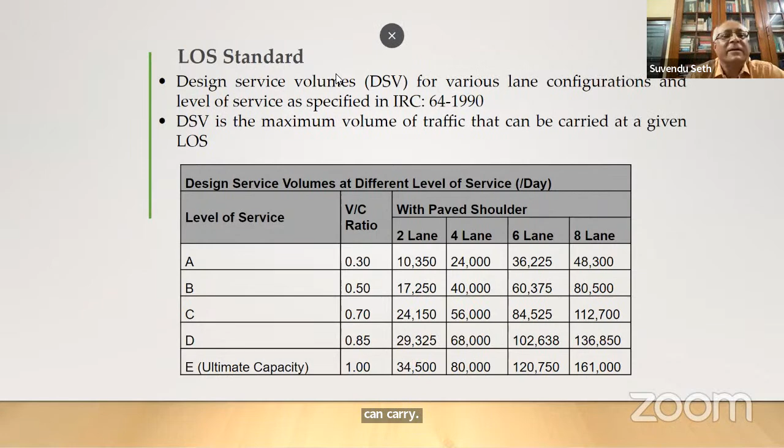There's an important term for speed. There are spot speeds, running speeds, and journey speed. Spot speed is the instantaneous speed at a specific location - one can stand at a location with a speed gun and measure the speed of vehicles going by. That would be the spot speed.

Running speed is average speed over a course. If we start from A and go to B, then divide the total length by the time taken to travel the distance, that is the running speed. Journey speed is slightly different - you're going from point A to point B, but also counting the stoppage time and delay time, and dividing the distance by total time. That gives the journey speed.

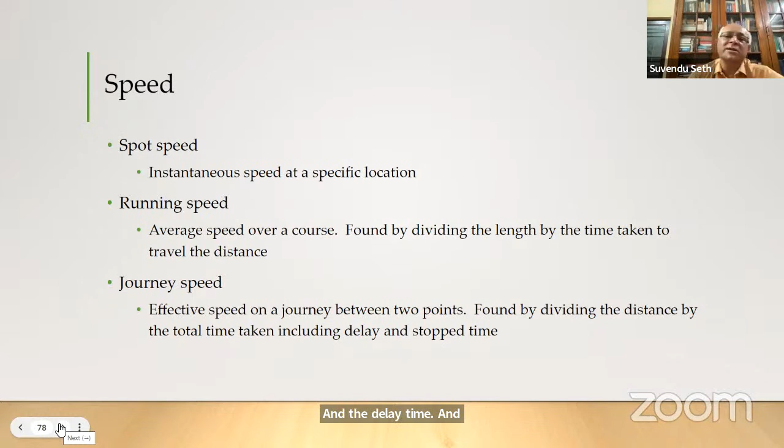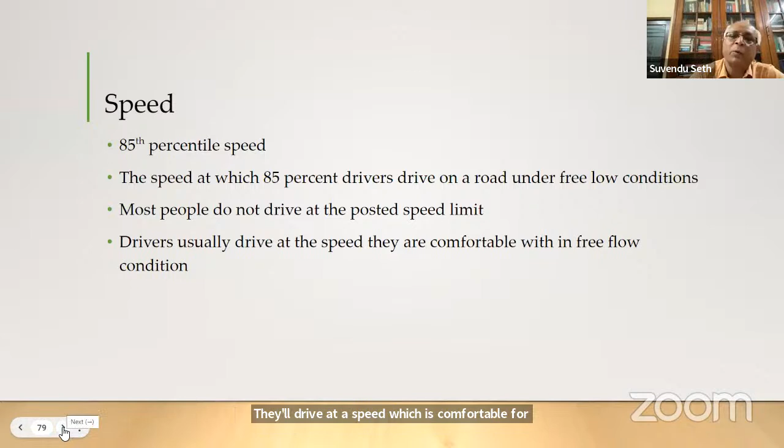Then there is the concept of 85th percentile speed, because at free flow conditions, when people can drive at whatever speed they want, they'll drive at a speed comfortable for them, irrespective of the posted speed. If you do spot speed analysis and see at what speed 85% of people were driving, that gives us the 85th percentile speed.

Well, I'll go to the next topic, which is traffic forecasting.

Traffic forecasting is very important for designing facilities for the future years. When we're designing roadways, we need to know what traffic it will carry, say 10 or 15 years down the road, and the number of lanes have to be designed accordingly. Or widening is required in future year or not. Or additional toll plazas are required or not.

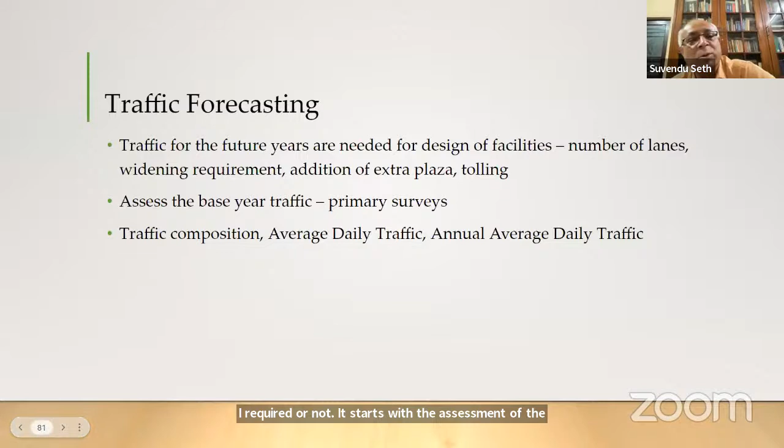It starts with the assessment of the base year traffic, and it is normally done by the primary survey, which I talked about earlier: the average daily traffic, annual average daily traffic, and so on.

And then we forecast the normal traffic. There are various types of data which are required. Historical data, traffic count data, if it is available at that location, is very useful because we can understand what has been the growth of traffic at that location. If it's not available, we look at other ways of doing it. Registered motor vehicles in that influence area is a very important piece of information to have, because indirectly it shows the growth of traffic in the area.

And other ways include finding out the relationship between traffic flow and economic indicators, including population, per capita income, net state domestic product, district domestic product, and transport, and these economic parameters are related.

The elasticity between the two can be estimated by doing regression analysis with various parameters, their values, and the traffic values. Growth rates can be estimated from there, and these growth rates are used to find out what would be the possible traffic in the future. Normally, three scenarios are done: an optimistic, pessimistic, and realistic scenario, to understand what kind of traffic can possibly occur in the future.

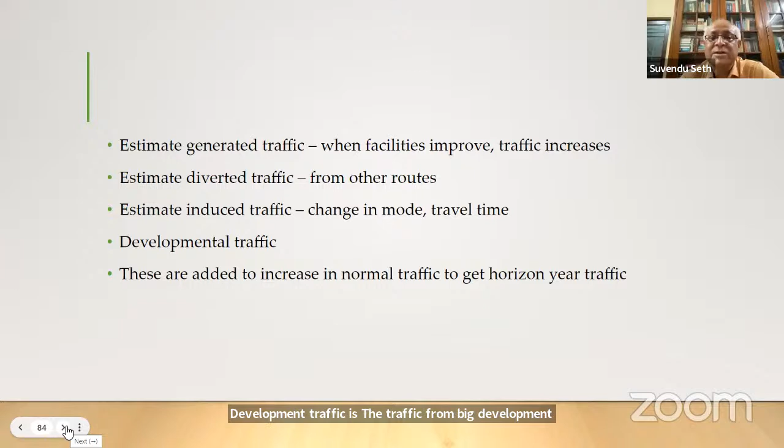And with it is added the development traffic. Development traffic is traffic from big developments near the roadway. If there's a big mall coming up or some office complex expected to come up, what would be the increase in traffic? That would be the development traffic. As I said, normal traffic is added to these to get the future traffic in the horizon years.

I'll come to development traffic next, which is the traffic impact assessment. Traffic impact assessment is a study, a tool to evaluate the potential impacts of the project being developed on the existing and future traffic of the network, and what kind of mitigation measures can be taken.

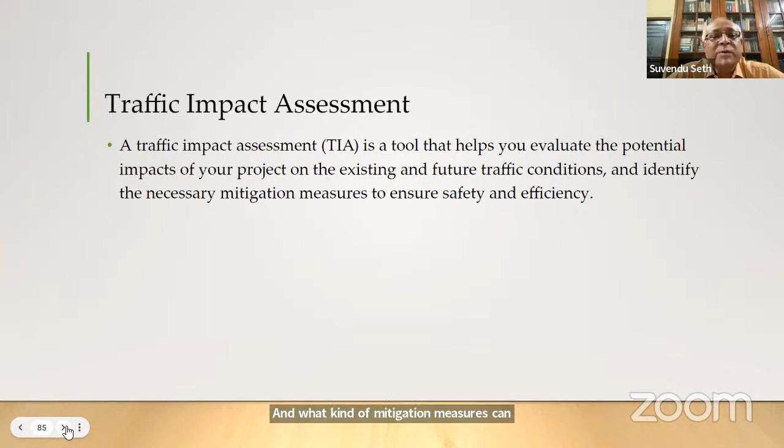If you look at the process of traffic impact assessment, first of all, it starts with description of the proposed development. What kind of development is being proposed?

Excuse me, there was a train going. So...

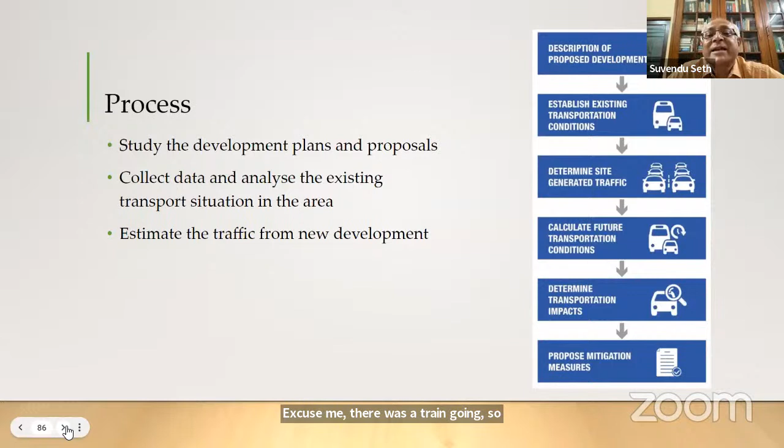Establish the existing transportation conditions in the surrounding area and in the peri-urban area also, at certain times. Determine the site-generated traffic: what kind of traffic the site is going to generate in future. That has to be done. Calculate the future transportation conditions for the network, determine the transportation impacts based on certain threshold values, and then propose the mitigation measures.

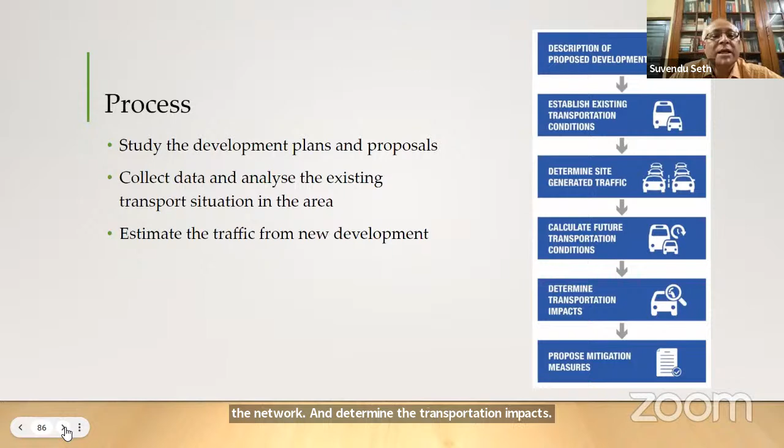So first, the site plans have to be studied, and it has to be estimated what kind of traffic will be generated from this site. It could be a residential, office, or commercial complex. You have to estimate that type of traffic that will be generated.

Then the modal split, to understand what kind of modes will be used by these people who are going to access this facility. Are they going to come by buses, trains, cars, pedestrians, or two-wheelers? Then the distribution is on which accesses, the exit paths or access points. And then do the assignment on the multimodal network in the immediate neighborhood and the wider neighborhood, to understand the impact.

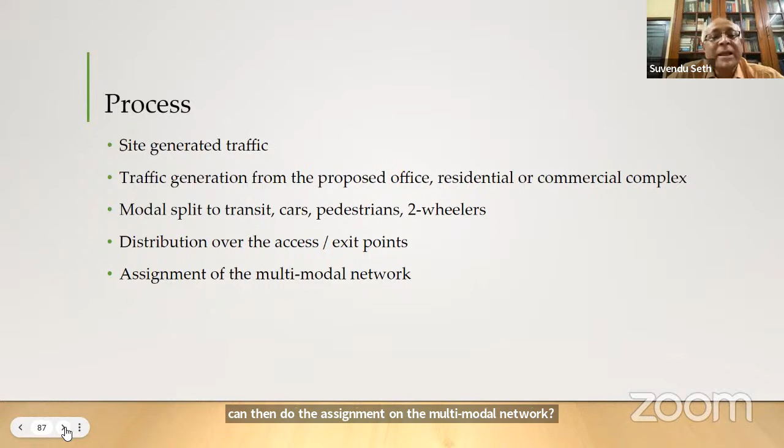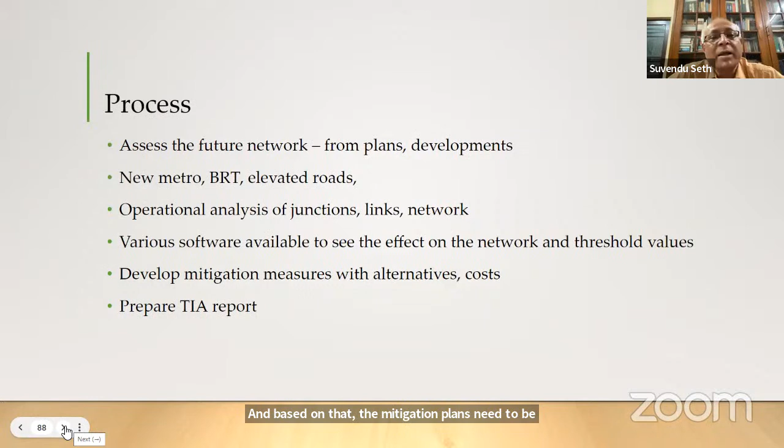For this, the future network also has to be assessed based on planned developments expected to come up—there could be a plan for a new metro or BRT service nearby, or an elevated road proposed in the future. This has to be taken into account. Then operational analysis has to be done for the junctions, links, and overall network, and threshold values studied to see how these will react to additional traffic. Based on that, mitigation plans need to be developed along with cost estimates, and the report prepared. So this is overall the traffic impact assessment and traffic engineering, road safety, and transport planning in a very short period. Thank you.